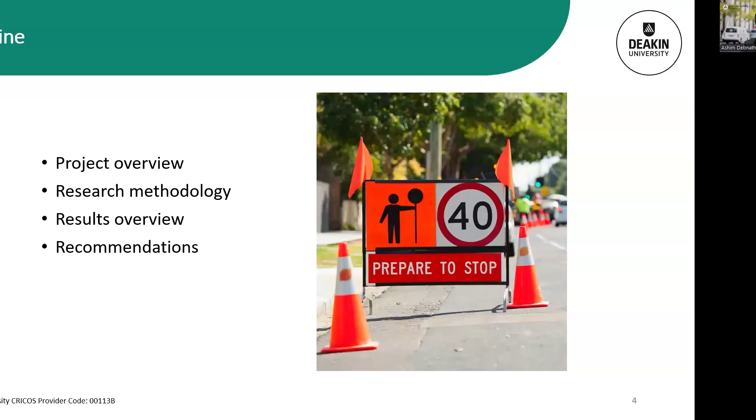Now, first of all, what we will do in this webinar, I will provide a high-level overview about the project. We will talk briefly about the research methodology so that any future projects could benefit from the methodology of this project. And the results of this project are massive. It's impossible for me to capture those in a one hour webinar. I will try to provide some high-level overviews, and of course, the reports are published now, as Ian highlighted. Those reports have got more detailed results, and we will finish up with some recommendations that we derived from this project.

So first of all, on the project overview, we wanted to reduce the frequency and/or occurrence and the severity of injuries to people that are involved in end-of-queue crashes. And that includes, of course, motorists as well as road workers. And in doing so, the overall plan is to improve the overall safety of staff and public at roadworks.

What are the outcomes that we wanted to look for from this project? We know that different types of temporary traffic control measures are used at roadworks. And we often have some anecdotal understanding about their effectiveness based on how our experienced road workers felt whether this device worked or not.

Sometimes we measure speed and compare the mean speed before and after. So there is a lot of anecdotal understanding and evidence that we have had, but a proper evidence base for a range of temporary traffic control measures was missing. And I thank Transport for New South Wales for taking this important initiative to create that evidence base for a range of traffic control measures

to obtain from this project. So that was our outcome, to create an evidence base for a range of traffic control measures that are suitable for end-of-queue situations.

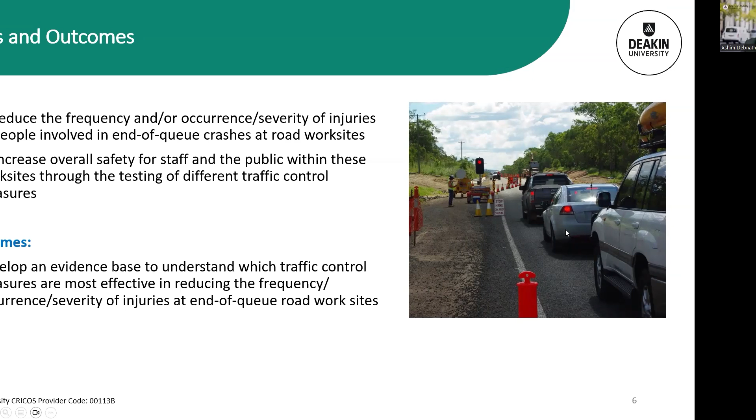For the high-level methodology, we had a 5-stage methodology in this project. First of all, we had a project plan where we created a project steering committee, including experts from a diverse range of areas, including traffic control, roadworks, as well as those who are managing the MUTCD-type manuals, for example, the TCAWS manual in Transport for New South Wales.

We then looked into identifying the end-of-queue treatments and best practices across the world. We, of course, had a comprehensive look into the literature. We looked into the different background materials available through our project steering committee locally here, as well as ran an extensive consultation with industry stakeholders and international experts who have worked in the end-of-queue and roadwork safety space. So from this, we created a list of end-of-queue treatments that we wanted to test in the current project.

Next, stage 3 came with actual testing of those selected end-of-queue treatments. We developed a study approach and we looked into trialing those on road. Once we collected the data, and I will get into the details of what type of data in the next few slides, we started looking into how to analyze it. Of course, traditional methods just look into the mean speed or the 85th percentile speed or percent of vehicles speeding with and without the control to get an understanding.

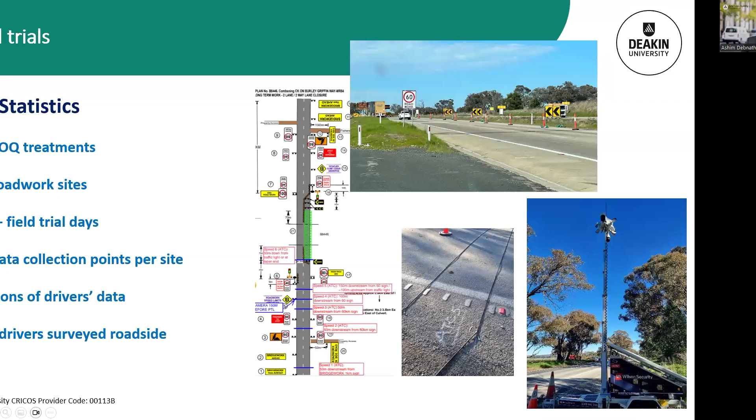Some were very basic, like different types of static signs. We looked into VMS, radar activated signs. We were also looking into the UHF radio, temporary rumble strips, some high-end end of queue collision warning systems, as well as some newer generation, as well as some combinations.

And we did all of this across 3 types of site: high speed, high volume; high speed, low volume; and low speed, high volume, so that these treatments were trialed across different types of work sites.

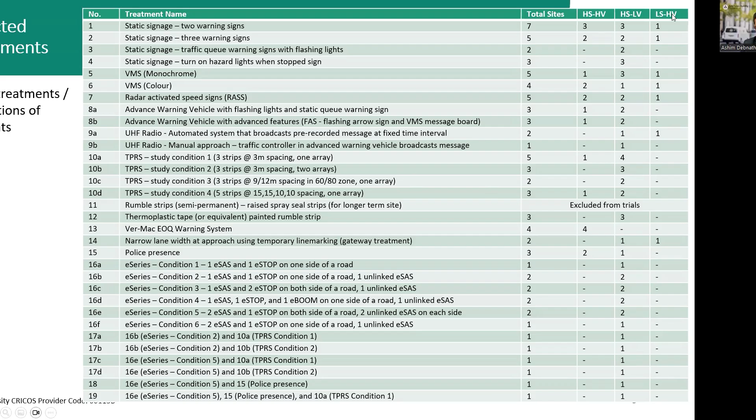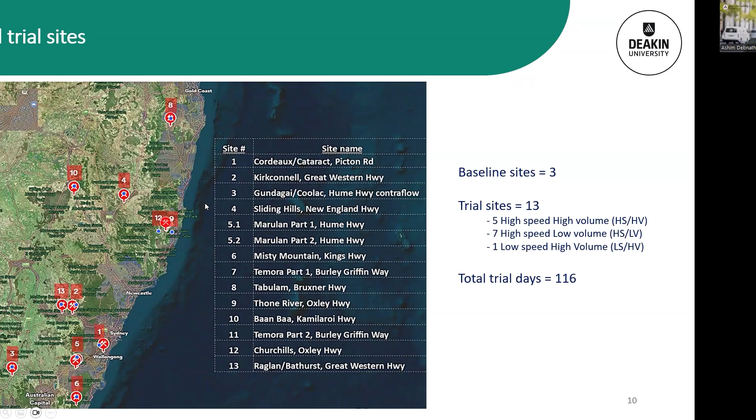Driver surveys, you might be thinking, how did we do this? So as drivers were stopped at a traffic light, researchers from our team actually approached them from the side with the help of traffic controllers spotting for them. And then we approached the drivers with some short predefined questions with some predefined answers. So based on their verbal input, we inputted those in our iPads.

So we asked them questions related to: did they agree with some statements about the end of queue treatments? What is their understanding about a particular end of queue treatment? Did they understand what this particular sign or message was actually trying to portray to them? What are their views of the future usage of these treatments? As well as, sometimes we had multiple options to choose from, so we wanted to get drivers' views on which option they would prefer.

So we ran those driver surveys, we collected speed data and video data. So I will tell a bit more about the speed data collection and analysis and the video data collection and analysis in this evaluation methodology. So we looked into speed using automatic traffic counters or the pneumatic tubes. These are called in many ways, right? So from these, we collected at least 5 points on the approach of a work site on one side, and we compared mean speed, treatment minus control. We looked into 85th percentile speed. We looked into percent vehicles speeding because this is what typically is done in the literature.

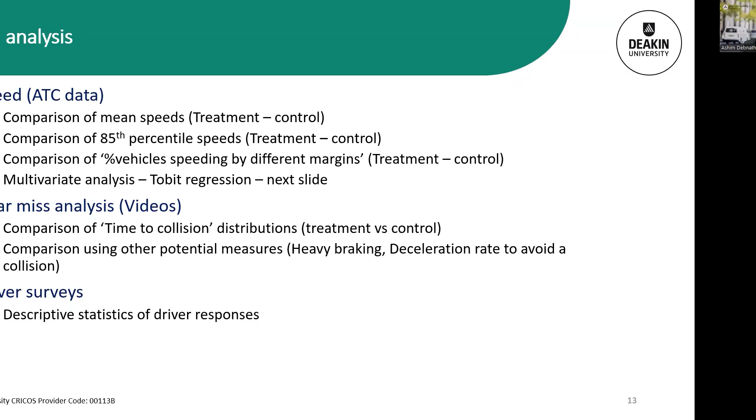We recorded videos using the cameras that you saw earlier, and we compared time to collision distribution as well as other measures of near misses for these end of queue situations. And of course, driver surveys gave us a view of what drivers felt, what drivers understood, what drivers preferred about the end of queue treatments. So we looked into all these three aspects for every single end of queue treatment that we have evaluated in this project.

So why do we need to look beyond mean speed and 85th percentile speed? So that's the speed distribution of any typical road. There's the speed limit. If we look at the left and the right, there's compliant and non-compliant. Primarily, our interest is on the right-hand side. So if we only look at the mean speed, from this distribution, we're only getting a single point.

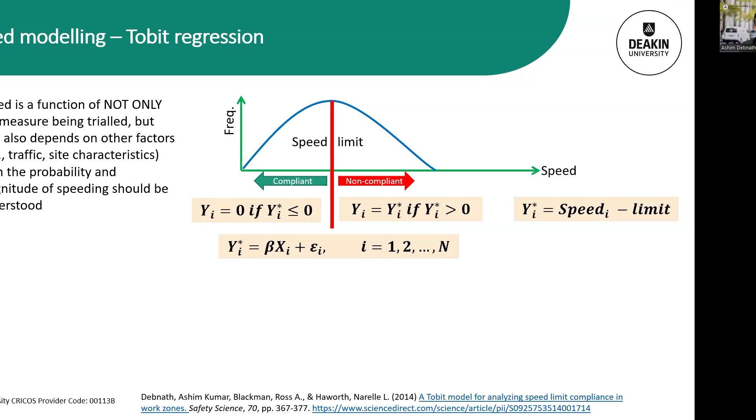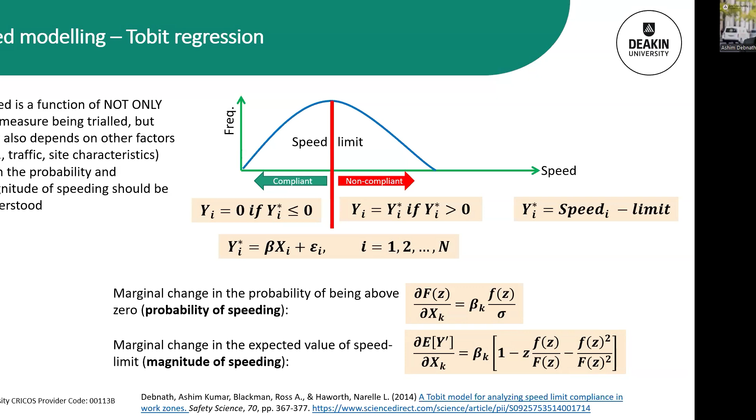That's not telling much. So we model this using a Tobit regression framework where the compliant drivers were treated as a particular group and the non-compliant drivers were modeled in this Tobit model. The beauty of this model is that it actually helps us to look at heaps of factors that just mean speed can't capture. And also, this Tobit regression model helps us to get two different estimates. One is the probability of speeding at a particular roadwork site. Second is the magnitude of speeding, or in other words, the amount of excess speed the drivers exhibited at a particular roadwork site.

Just to show you the different types of factors that we considered: there are 5 to 6 speed measurement points, and whether treatment was on site or not. That is the key variable that we considered. Time of day, and if there is a platoon of vehicles.

So if vehicles are moving in a platoon, of course, the speed of the platoon leader would be setting the speed for the vehicles that are following. So we wanted to capture that in our analysis. We also looked at the type of vehicle that as a driver I have in front of me, and that would influence my speeding behavior as well.

We also looked at traffic volume, proportion of heavy vehicles, proportion of vehicles that were speeding, as well as proportion of vehicles that were speeding by quite a bit of margin, so that we capture the whole traffic scenario in our modeling. So in this model, when we put together all of those variables and then this particular variable, treatment on site, it gave us the true contribution of speed reduction of that particular treatment.

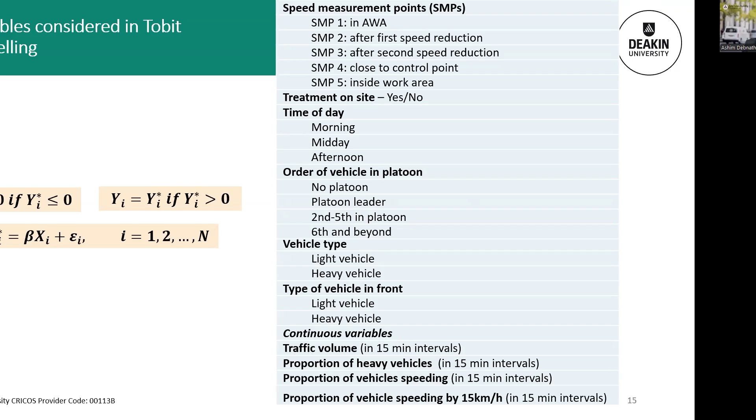Video data analysis: we looked into two particular measures, time to collision and deceleration rate to avoid a collision. I'll show you a visual here. Two vehicles moving 40 and 45 at a particular given time. If we let them continue at their current speed, they would collide at some point. And that time is called time to collision. Deceleration rate to avoid a collision, DRAC, is referring to at what rate the follower vehicle would need to decelerate to avoid a collision.

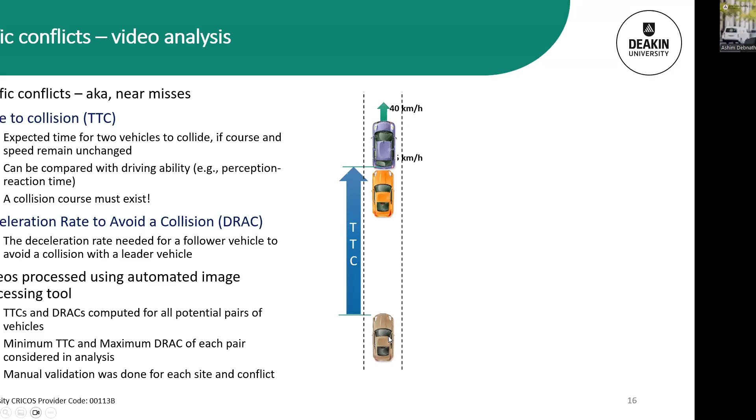And those recorded videos we processed using an automated image processing tool, which helped us to get the trajectories of every single vehicle. Our team looked into a manual validation process of these trajectories so that we could avoid issues in terms of false conflicts and so on. So we did all this to get an estimate of the collision risk using an extreme value theory analysis approach.

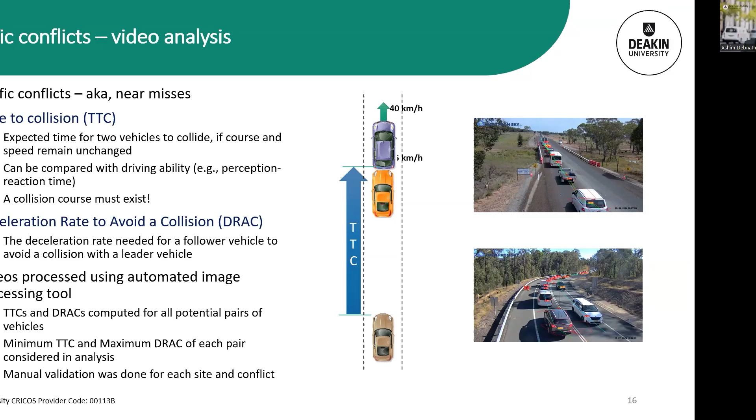And you know that there are multiple points in a roadwork site. So we looked into 3 areas. One is the advanced warning area before the treatment, one in the advanced warning area after where the treatment was located, and one is in the transition zone going into the taper and the safety buffer area. We also looked into the impact on rear end crash risk. We looked into the driver views about the treatment's effectiveness, as well as drivers' views on the future use of this treatment.

By considering all of those, these 32 treatments we have categorized into 4 categories: most effective, moderately effective, limited to no effects, and then another group called the treatment combinations. That's where we put 2 treatments together, and we wanted to see if they actually add any additional benefits. So I'll take you through these 4 groups one by one, of course focusing more on most effective treatments so that we understand what those are.

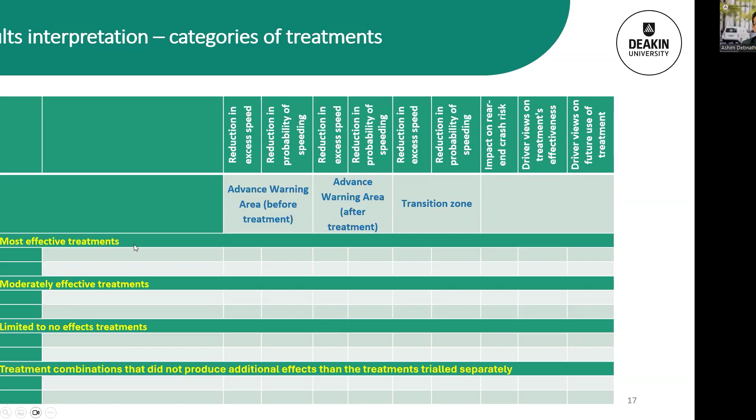Just very quickly, how did we consider this grouping? Of course, excess speed is different from speed. It's not mean speed, it's the speed above the posted speed limit. So if the excess speed was reduced by 2 km, it's not the mean speed. So this value has got more significance than mean speed. We used some categorization of this by looking at the speed distribution values.

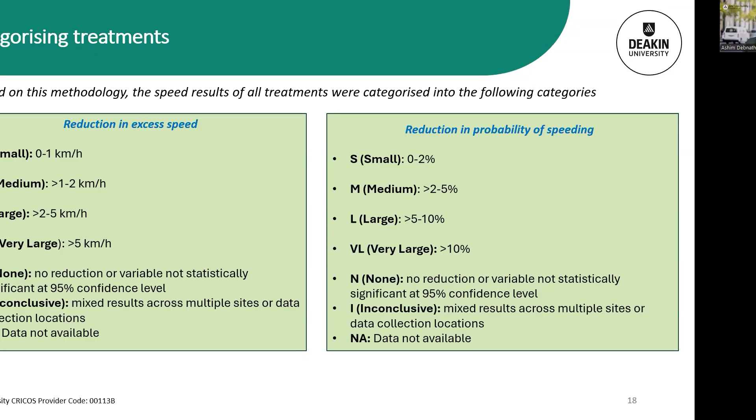We also looked into the probability of speeding and categorized them into small, medium, large, or no significance, and so on. We had an inconclusive category because we had multiple sites, and if we saw that in one site it was positive, but for the same type of site it was negative in a different site, it was inconclusive. Rear end crash risk, we categorized as increased if both DRAC and TTC show consistent results. If both of them decreased, we put them into decrease, or if opposing results, it was inconclusive.

In a similar way, drivers' views, we had positive, negative, and mixed, depending on their views on the effectiveness of the treatment and future usage of the treatment, what they felt.

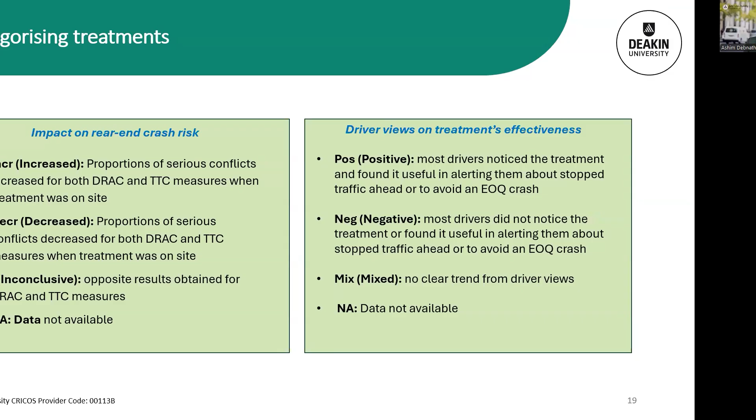So in the summary, for the most effective treatments, we have these treatments from this 32 list. Don't worry about all the L, M, and V's, I will take you through this a bit later on. But for now, what is E-series condition 2? It may mean nothing to you.

So we have got some photos. The E-series treatments are from these arrow E-series devices, which has got a traffic light and a boom gate, and is called eSAS, a VMS board that can actually show messages. But the beauty of this is that all 3 can be integrated and they can talk to each other.

So we had 6 different conditions in our trial. In condition 1, we had this eSTOP and eSAS only, and this line means they were talking to each other, they were interconnected. If the status of E-stop changes, it would show a message on eSAS accordingly. Condition 2, we had an additional eSAS, but it was not linked to those.

So this will show a standard message. It will not change depending on the condition of that red light or green light. In condition 3, we had 2 lights, 1 light on each side of the road. Condition 4, we added the boom gate. Condition 5, we had all 3 of these, so the 2 eSASs, 1 on each side, and all 3 were linked. There's 2 which are not linked to the others.

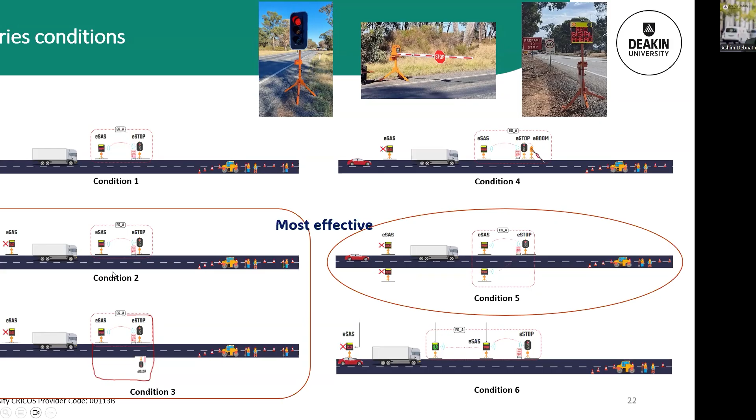I will elaborate a bit more on condition number 2 in the next few slides. But before that, what are the other most effective treatments we had? Temporary rumble strips are widely used, and we found those very useful in alerting drivers about an upcoming work zone, as well as reducing their speeds and improving their attention. We had 4 conditions to test.

In condition 1, we had 3 strips at 3-meter spacing each. Condition 2, we had 2 arrays of condition 1, so 3-meter spacing. Condition 3, where we had 3 strips at the same spacing, and here depending on the speed, the spacing is 9 meters for 60, 12 meters for 80. And condition 4 is a variable spacing.

There's 5 of those, and these conditions were derived with input from the Transport for New South Wales team by looking into the manufacturer's prescriptions, as well as what we have currently in the TCAWS manual. Now from here, we found that condition 2 was among the most effective treatments, where we had 2 arrays of 3 strips at 3-meter spacing.

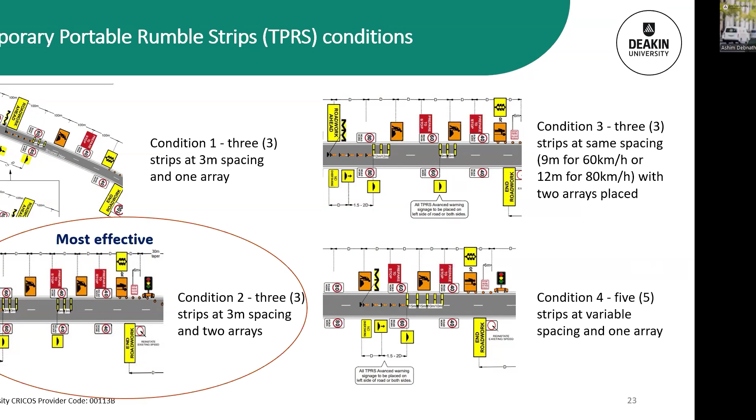Other most effective treatments, and no surprises here, police presence always works, and we also found the same. We also looked into an innovative treatment called narrower lane width or gateway type treatment, where we used cones and bollards to narrow down the lane width, so that as people approach a work zone, which is on the right-hand side, they go through this gateway, and what effects it may have.

We also looked into this standard static sign with flashing lights on top, so that you can see one, there is another one that was alternatively flashing. And there's one of our wonderful friends who helped a lot with the field data collection, so very proud to show him here.

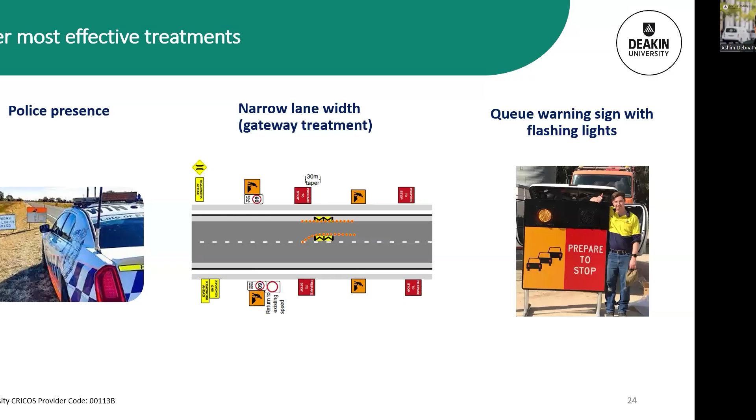So the summary of all of those treatments, we had these treatments categorized as most effective. Let's look into E-series condition 2.

In the advanced warning area, before treatment, the excess speed reduction, probability of speeding reduction was large and very large. Same goes for after treatment. When it goes into the transition zone and the taper, it is lower, so moderate and large. Looking into the rear end collision risk, it decreased. Drivers were mostly positive about the effectiveness of the treatment. They also were positive about wanting to see this in future work sites.

In a similar way, if we look at police presence, for example, it had large and very large, large and very large, and continued through the taper and safety buffer area. But we found that the rear end crash risk, instead of decreasing, actually increased. Drivers' views were mixed. Some did not like to see police on site, and some did not want to see them at future sites as well.

Why it increased may seem counterintuitive, but the reason is that police was located at a particular point in the work site, and of course they had their flashing lights on, and based on the visibility, some people may have reacted a bit harshly in terms of reducing their speed, which may have actually caused these near misses that were recorded using TTCs and DRACs. That is one of the reasons, and that's a phenomenon we also observed for temporary rumble strips. It alerted people, and people were positive about those, but we saw that the crash risk was increased.

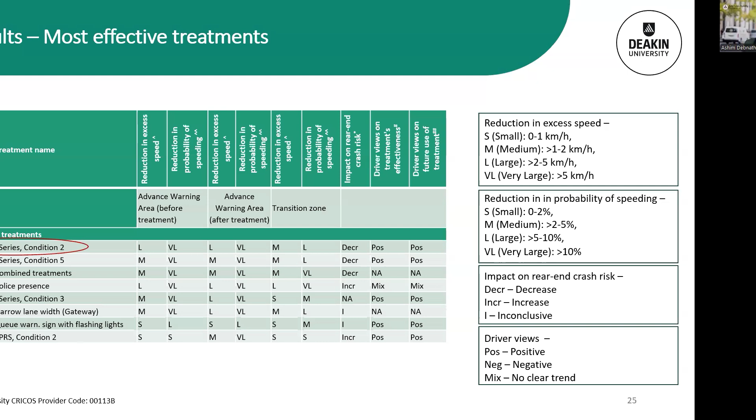These values were calibrated by considering the effects of other variables. So if we only look at treatment and don't consider any of this, the values we get would be different, because these are not the true effects of the treatment. But if we consider all these variables, we get the true effect. So that's what we did.

From here, what we did for the different speed measurement points—there are 5 for this particular treatment—is look at the change in excess speed, without and with. So negative means it was a reduction. Same goes for the probability of speeding.

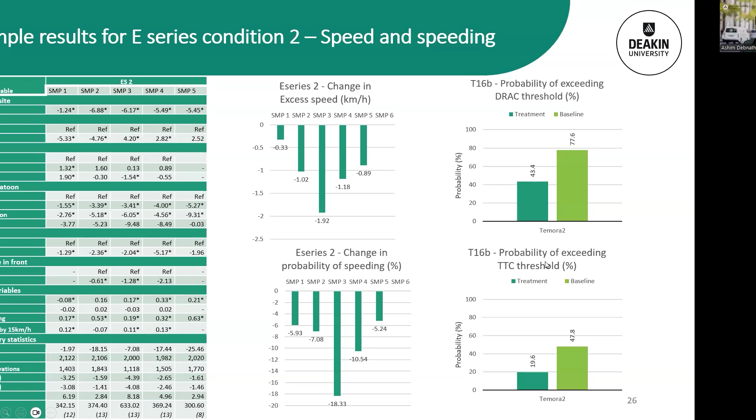And usually in the literature, we use 1 second as the threshold, so things on the left side of it we compared to get this estimate of exceeding that threshold.

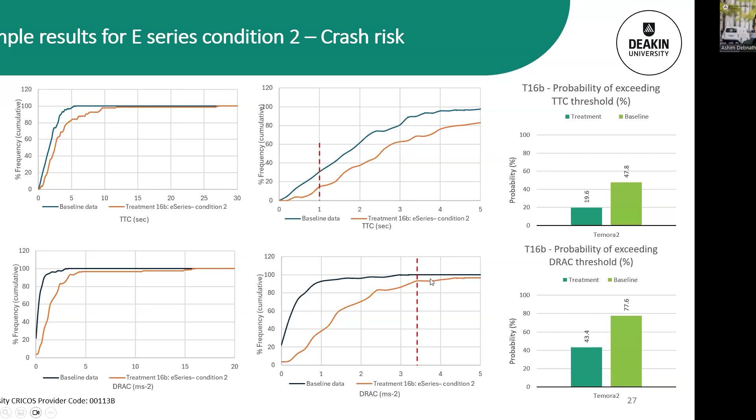For DRAC, we use 3.4 meters per second squared. Here it's not the left side but the right side, things that are higher, meaning I needed to brake harder, decelerate harder to avoid a collision. So we looked into that and again compared the treatment and baseline.

Driver survey results, we asked them multiple questions. For example, for this particular treatment, the question was, did you notice the 2 signs showing your speed? Most of them noticed; some only noticed 1, not the 2. We asked, did that help them be alert of the stopped traffic ahead? Mostly the response was positive, some were unsure, some did not.

We asked, do the signs help drivers avoid an end-of-queue collision? Most people agreed. Do they want to see this in the future? Most people agreed. Then all of these questions we divided into different categories of demographics.

For example, young, mid-age, and old-age drivers. Of course, we did not ask the drivers how old they are—this is our interpretation, and I think our team did okay guessing people's age. Gender and vehicle type we also considered. So just to show you, we also looked into some breakdown of the driver survey results, and we did similar results for all treatments that we considered.

Okay, now I want to move on to the next group of treatments, which is the moderately effective treatments.

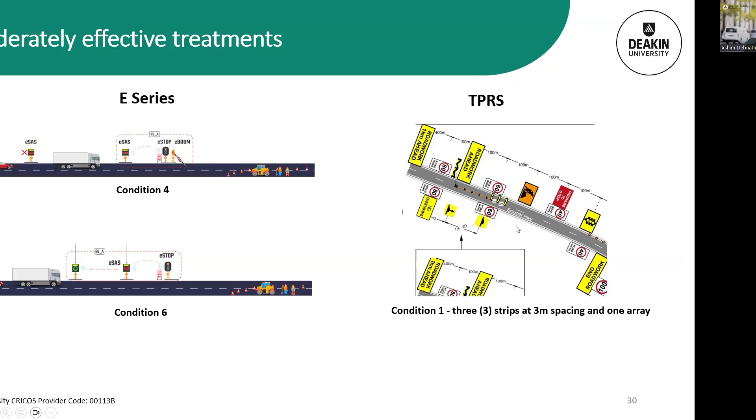TPRS condition 1, where we only had 3 strips. The most effective one had 3 strips in 2 arrays, but here there is only 1. Having 1 gives moderately effective results, while having 2 arrays gives more effective, better results.

We considered this configuration of a static sign, the symbolic queue and 'prepare to stop', which was selected through a focus group discussion with road users and industry experts, looking into multiple combinations. We found it to be moderately effective.

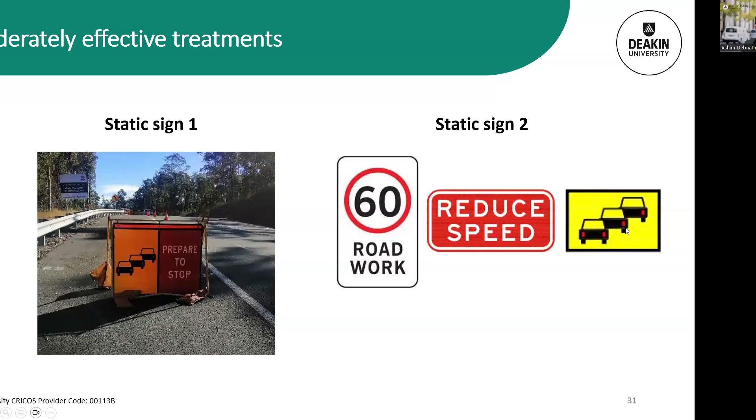So a simple static sign can help people reduce their speed and be aware of work sites. There is a series of signs used in sequence, starting with this, then 'reduce speed', and then this symbolic queue-ahead sign. This was also moderately effective.

On some roads, even without this sign, we found people were doing this because it was foggy, and they said they usually do this in this area. For the sites where we trialed this treatment, we found moderately effective results, which was a good thing.

We also compared VMS in 2 conditions: a color VMS versus a monochrome one. The results for the color VMS were, of course, more positive in terms of reducing end-of-queue risk and driver speed.

We looked into 2 configurations of UHF radios, and this evaluation was restricted to heavy vehicle drivers only. The 2 combinations were manual and automatic. In the automatic version, predefined, pre-recorded messages were relayed at regular intervals. In the manual version, a person at the work site broadcast those messages at regular intervals.

We found that the manual version had a better effect than the automatic one. Of course, we also saw some unwanted consequences, with drivers getting into conversation or trying to say things to the person broadcasting those messages on radio. So there are some unfortunate consequences to keep in mind.

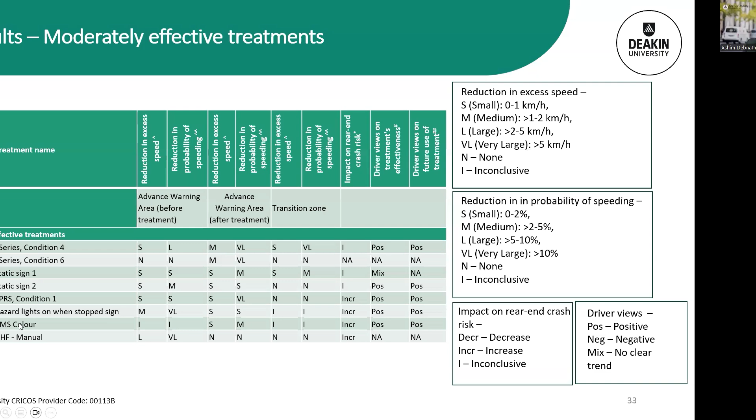And we had two other groups, so I will not go into the details of those so that we have time for some Q&As. We had some other individually trialled treatments like the VMS in monochrome, radar activated speed sign. We had an advance warning vehicle put in the advance warning area with a static sign on it, with a VMS on it, to alert drivers of the upcoming work zone. We also had rumble strips, the two conditions where we had variable spacing or longer spacing than 3 meters.

We used the zigzag lines, the type of lines that you see on the road as you approach a pedestrian crossing, for example. Ver-Mac was a high-end end of queue warning system typically used in the US. We trialled those, and our effects unfortunately were not as good as found in the US. And E-series condition 1 had some treatments here, but we have seen the other E-series conditions were producing really good results. We wanted to see if adding multiple treatments on one site can actually have additional benefits.

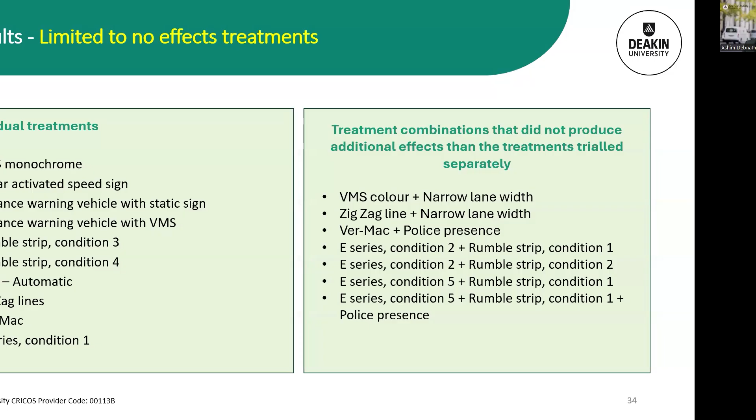So for example, this narrow lane width, which was the most effective treatment, we combined the VMS colour with it, but the additional benefit did not outperform narrow lane width alone. Same goes for the zigzag line with that. We did not have additional benefits. We did Ver-Mac, police, E-series conditions with rumble strips. And our conclusion here is that having multiple things does not necessarily lead to improved results or additional benefits on the sites. Now, a couple more slides, and then we will get into questions.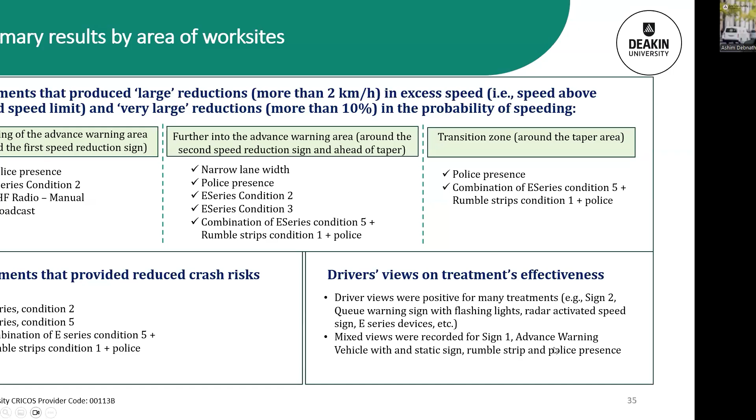When we looked into the crash risk, there are some that actually showed significant reduction in crash risk. Some, of course, had a bit of increase, but had benefits in terms of reducing speed. Drivers' views are mostly positive for most of the treatments. For some treatments there are mixed views, like static sign number 1, the advance warning vehicle having a static sign, rumble strips or the police presence. So there are some concerns from people.

So what are the recommendations from all this work? The first one is that we recommend that those treatments identified as most effective and moderately effective be considered for use on roadwork sites to manage end of queue crash risk. We also recommend that before using those treatments, a site-specific risk assessment should be done so that the site conditions, traffic guidance schemes, and more importantly, the cost implications are considered prior to using those treatments.

We recommend to Transport for New South Wales and the wider transport industry to extend the trials that were done in this current project. For example, this methodology could be used to apply the trials to more sites and for longer time frames, because we only looked at a short time frame assessment. We should look into the long-term impacts. The trials that we did were short term, about a week or so. So the novelty effect of those treatments may not have been properly looked into. Future projects could trial this long term and look into the novelty effects of those treatments as well.